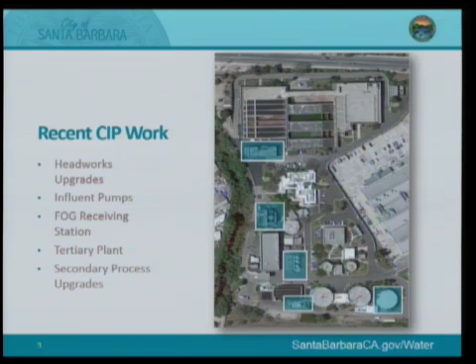And finally, in construction now, at the top, is our secondary process improvements project. That's a $32 million project where we'll be upgrading our secondary process.

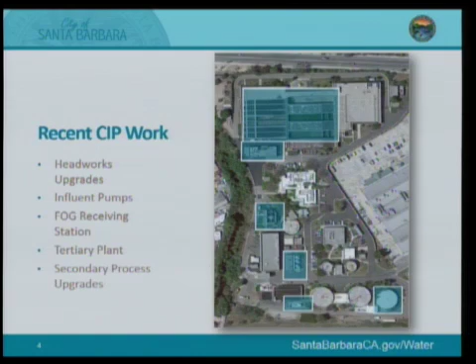So planned work on the consent item was our fiscal year 17 project. That'll be replacing some of our primary sludge pumps, looking at the line going from the sludge pumps to our gravity thickener, making sure it's in suitable condition, installing a Vactor dump station, and just some of the low-hanging fruit from our biosolids study.

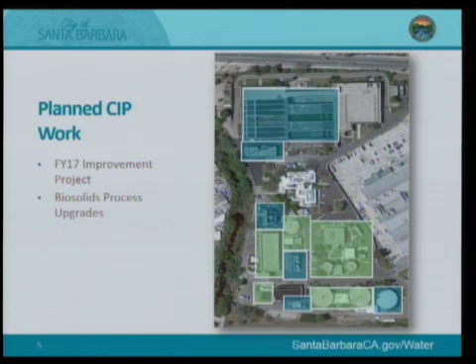We recently completed a biosolids study where we'll be doing some significant changes to the plant. Highlighted in green are all the areas we're going to be touching, and I'll just talk about it briefly so you can get an idea of the context of this project. It's going to be a $30 million process improvement project where we'll be doing some upgrades to our digesters. The big green box on the right-hand side, that's where we have our maintenance facility, our gravity thickener, and our DAFT.

Those are all used to thicken the sludge before it's pumped to the digesters. We'll be basically tearing all of that out, going to centrifuges to thicken, which is going to be a much smaller footprint, and then installing a sludge haul-out facility.

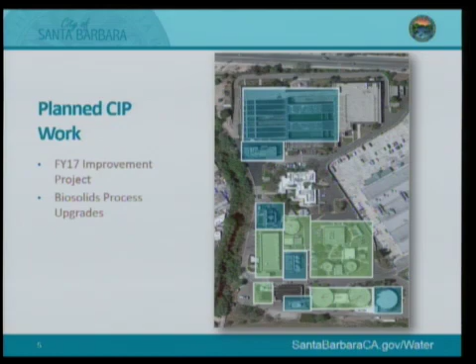Our sludge building, our solids building, is on the left side. That'll be transformed into a maintenance building. It's got some seismic issues, so we'll be making those upgrades. In addition, we'll be removing our sludge holding tank, and that area where we place all of our solids out to dry before we haul off, that whole mess, will be all cleaned up because we'll have a new state-of-the-art haul-out facility.

So what's left? There's a lot left to look at. We've taken care of all of our major process areas. Now we're going to be looking at replacing equipment.

One of the big items we'll be looking at is our electrical distribution system. 4 of the 5 electrical distribution system substations are shown on there. Those need some work. Those are very critical to keeping the plant running, and we'll be looking at that in combination with our 2 generators to make sure we rehabilitate and are well equipped for power losses. We have a 2 megawatt generator and a 900 kilowatt, but the 900 kilowatt definitely needs to be replaced.

And we need to work through a process on how to best equip us for failures, especially if the 2 megawatt were to go down. That's the one we rely on when we have a full power outage, and it runs the plant.

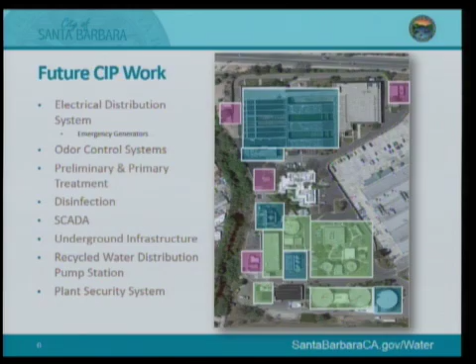We'll be looking at odor control systems. We've got some that will be taken care of with the biosolids project. We do have at least one that will need rehabilitation.

We'll be taking a look at the primary and preliminary treatment areas. Our grit chamber is a single point of failure. We can't take it out of service right now to repair or rehabilitate it. We'll be looking for solutions to do that in the future, to give us more operational flexibility.

We'll be doing some replacement of equipment at the primaries.

Disinfection, down at the bottom, we'll be looking to do some work on our chlorine contact chamber. It's in need of significant repairs. Operationally, it's very challenging for us to go in and clean it because you can't take that process out of service, and we don't really have any way of bifurcating it right now to do cleaning. It was a challenge last time we cleaned it. We need to clean it fairly soon, and we'll be looking for sensible solutions to fix that area.

We'll also be looking at our SCADA system, upgrading our SCADA master plan, coming up with a plan on how to phase out our old software equipment and bring in new.

Underground infrastructure, most of it is in pretty good shape, we think, but we want to look at when we should start replacing it. We have been doing manholes. We have more manholes to do and getting them on a cycle.

So that's some of the work we see coming on the horizon. The approach we'll be taking is developing a roadmap. This will be a more detailed 10-year plan where we'll be developing packages of projects based on criticality and funding over the next 10 years.

We'll have the schedule dialed in, we'll understand the cost estimates, but we'll also be looking at the 25-year plan. What else do we need to be thinking of between the 10 and 25-year time frame, though not quite as detailed a look. Brown & Caldwell is going to go through and take a look at all of our equipment, our maintenance records, our record drawings, and some of the studies we've done recently. We've done a concrete assessment study and an electrical study, putting that all together and ranking everything on a criticality basis.

The map or grid you see in front of us has on the vertical axis the likelihood of failure. Where do we put that based on 1 to 5, based on previous maintenance records, lifetime expectancy, and things like that. On the horizontal scale, you see the criticality of failure - how critical is that piece of equipment in our process, 1 to 5?

At the end of the day, the product of those two numbers gives us a criticality rating. Everything in the red, that stuff we're going to address first because it's the most critical - more likely to fail and it's got a higher criticality rate. The green will be pushed out probably into the 10 to 25 year time frame.

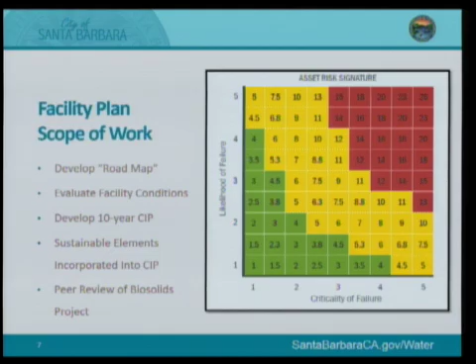While they're doing this, we're going to be looking at sustainable elements. Probably one that comes to mind is reuse. As we're going through trying to put packages of projects together, we'll take a look at where our long-term goals and plans are, and make sure we're not putting something in today that we'll be ripping out tomorrow.

And the final thing they'll be doing is a peer review of our biosolids project. As you saw from the green squares, there's a lot of moving parts in there. We'll be demolishing whole buildings, and we want a peer review before we really commit to that plan.

One thing this facility plan is intended to do is help match pay-as-you-go funding with the projects, and confirm that our 10-year financial plan is on the mark for rate increases, so we don't have any big surprises coming down the road with funding.

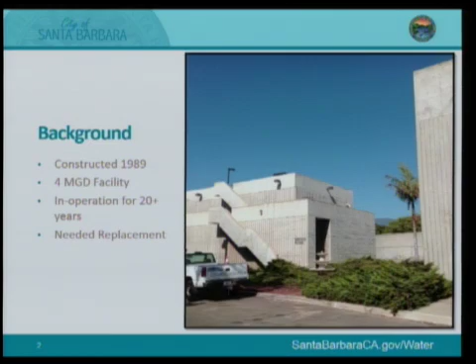Back in 2012, we made the decision to replace the facility in its entirety rather than rehabilitating it. Those are some of the pictures you see of the corrosion on the old facility. In 2012, we did an assessment and preliminary design. In 2013, we did the final design, and in 2014, we started construction.

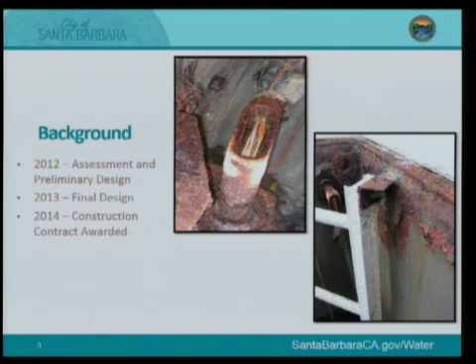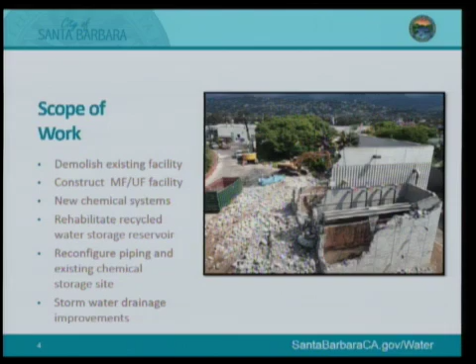Construction is now complete. The scope of work included demolishing the existing facility - there's kind of a fun picture of it partially demolished - constructing the new MFUF facility, putting in new chemical systems, rehabilitating the recycled water storage facility, reconfiguring some of the piping, and some stormwater drainage improvements. That's the bulk of the improvements.

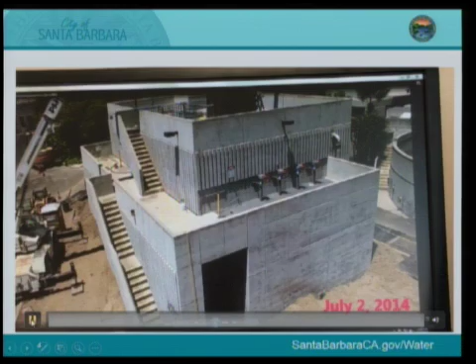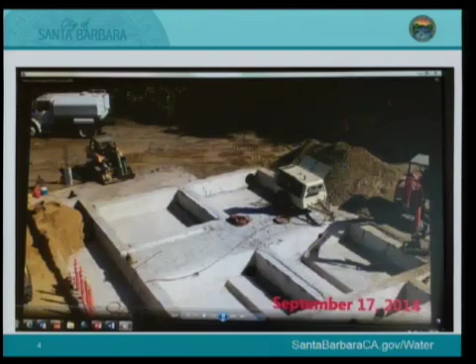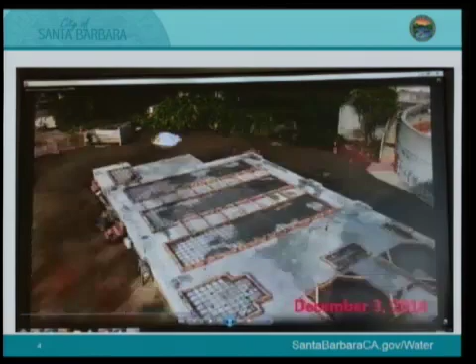Kind of a fun little slideshow here that's going to show you it get constructed. We installed a time-lapse camera, and these are just snapshots of it being demolished. Now you're going to start seeing the foundation being built - that's some of the concrete work that was done. This is the foundation; you'll start seeing the 3 pads for our 3 UF trains.

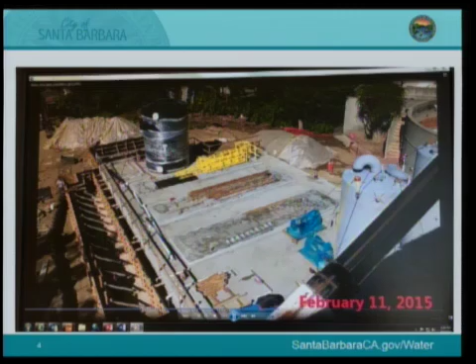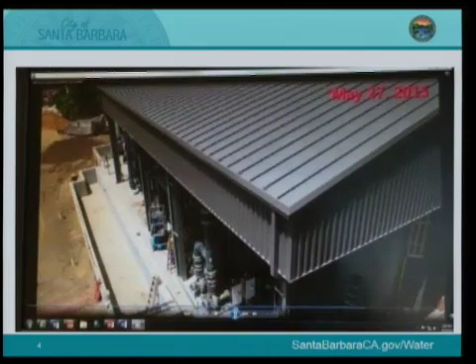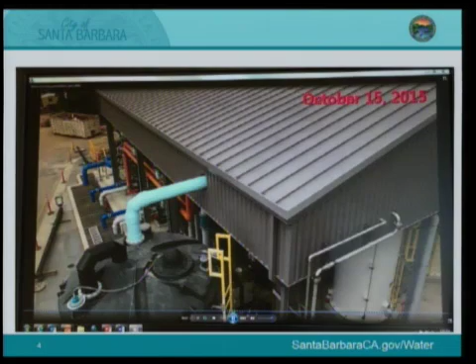On the left side, they were installing the trench for all of the utilities - those are the skids right there. Unfortunately, they put the canopy up right now, so it's harder to see, but you'll start seeing some of our tanks. We had the chemical tanks being installed, and you'll see a big black one - that's our filtrate tank. And there it is, complete.

On October 30th, the regional board gave us permission to start distributing recycled water. We did that, and at that time, we were only able to reliably produce about 0.7 million gallons of water per day.

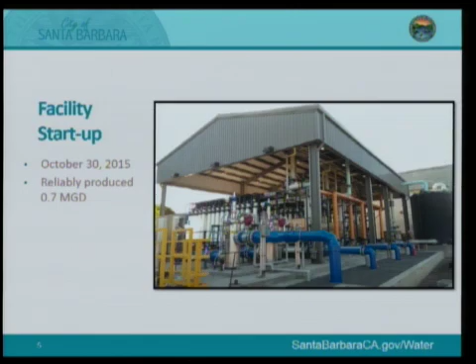Back in June of 2016, we contracted with Trussell Technologies. They were helping us optimize our recycled water production. The goal was an 8-week contract so that we could increase production and meet summer demands without having to augment with potable water. In addition, they were to evaluate the membrane system capacity.

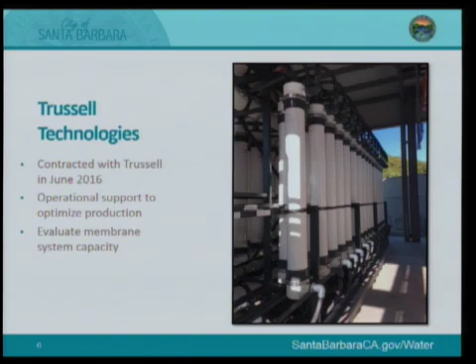Some of the things Trussell has worked with us on, that I'll go into greater detail on, include a lot of operational changes to our cleaning protocols, some programming changes, our backwashing. We installed a coagulant system, and also made some process changes at El Estero. All of this to get us up to about 1.5 million gallons per day of water to meet the summer demands.

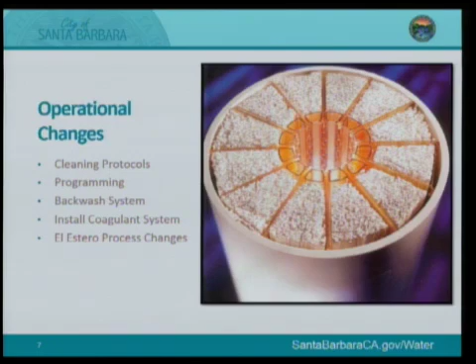So as I talk about changing our cleaning protocols, we have a couple of different chemical cleans that we perform. We perform mini cleans, using an acid and an alkaline clean. Those help us with the scaling and the metals, and also with the fouling from organics. And then we also have the full cleans. Those are not as frequent. They are more intense, to help restore the overall permeability.

When we first started with Trussell, we were doing mini cleans on a time-run basis. So every time we had 48 hours of run time on a skid, we would do an alkaline clean. The alkaline clean is for the organic fouling. And then every 96 hours of run time, we would do the acid clean for the scaling and the metals. We were seeing a lot of fouling with that cleaning regime.

In addition, with our full cleans, we were doing them on a monthly basis, and we had no real flexibility. So we came in, did a lot of programming, some trial and error, and we've gotten to the point where we are doing the mini alkaline cleans on a daily basis. Before, it could have been anywhere between 3 and 5 days, dependent on runtime. We do them now every single day.

We do them at night when we have the least amount of flow coming into the plant, so that we can get the highest amount of production during the day when we have the largest amount of feed water. We do our acid cleans every 3 nights. So all in all, we're now doing 4 cleans per night. We're cleaning all 3 of our skids for organics, and we rotate through the 3 skids for the inorganics. We also do a full clean once every 3 weeks, and we rotate through the skids.

This may be a silly question, but why can't we flip the filters over? If we're getting settling at the bottom, can't we just put the discharge on the bottom? Well, it's gravity that's settling them down, so we just changed up the regime and worked with it so that we've got a more effective use of water and air to keep it agitated, suspended, and flushing it out. It's been working really effectively to do that.

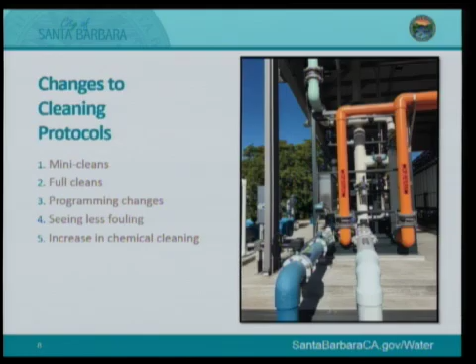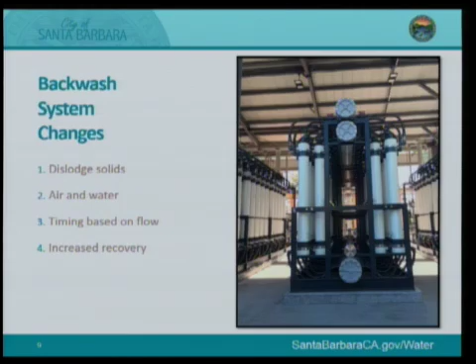I don't know that flipping it upside down would necessarily do much, because if you don't have the right combination of cleaning, you're still going to have it settling. If it's settling to the bottom, it'd be easier to flush out the filters. You also have your sewer drain line—the white pipe coming out on this side is your drain back to sewer. Your backwash water comes in on the top and drains out the bottom, but you're still getting it collecting. Your feed water comes in on the bottom.

The next thing we did is we installed a coagulant system. The coagulant system is going to help with that colloidal fouling—those really small particulate solids that get into the membranes, pass through, clog up, and cause fouling. The coagulant helps the particles cling together and become larger so they're not able to pass through the membranes to begin with.

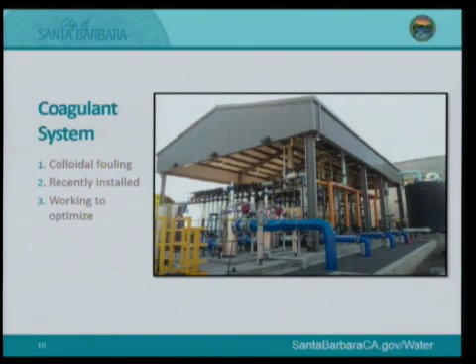It was recently installed. When we put the skids to work really hard, if we have to produce a lot during the day, we'll put the coagulant system on. We haven't seen great results yet, but we're still working to dial it in, and we'll be working closely with Trussell to diagnose whether we need to apply it further upstream in the process to give it more time for those particles to clump together. It's still a work in progress, but we feel it will be effective in helping with overall production.

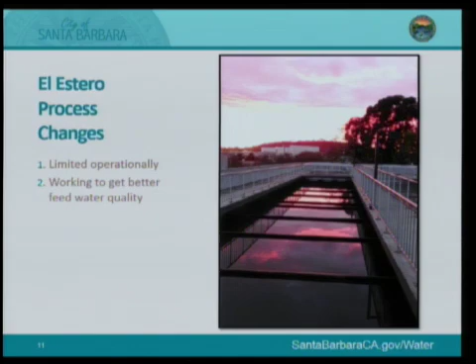We've also done some changes with our secondary process. There's not much we can do because of the state the plant is in—we're doing that $32 million project that will help us tremendously with water quality in the future. What Trussell is helping us do is operate much more aggressively than we ever have in the past. We're increasing our SRT, our solids retention time—that's how long a solid stays in the system before it's wasted on average. When you increase that SRT, you get better water quality: lower turbidity, lower total suspended solids, which is all better for filtering.

However, as you start to increase your SRT, there becomes a point where it becomes challenging to manage operationally, because you start floating in and out of nitrification, which can be problematic. We've seen this in the past where we denitrify in the secondary clarifiers—there's a picture of a secondary clarifier—and you'll end up floating sludge over the weir and violating your permit. So you have to be very, very careful. It's a very thin line between in and out of nitrification.

So we've stretched it about as far as we can. Traditionally, at this time of year, we do float in and out of nitrification. It's something that's very hard to control. We're currently doing that, and they're working with us to control it. We're challenged by our air, our blowers—we have too much from one blower, not enough from another. We just don't have that range we really need to better control it. And there's some operational practices that they're working with us on.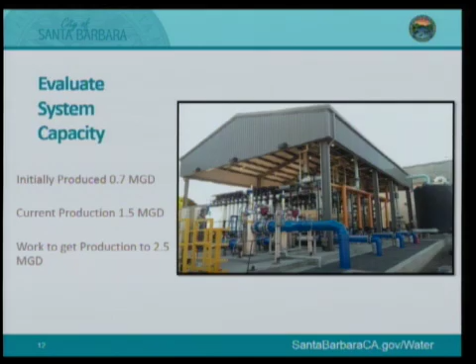We've also continued our negotiations with La Cumbre Country Club, who's very interested in connecting to our recycled water system. Unfortunately, until we can achieve that 2.5 MGD, we just can't commit to selling them any recycled water at this time. But they are extremely anxious to get connected, particularly as this drought wears on. They do see this as a viable future for them, and it's unfortunate that we haven't been able to get the facility up to that full capacity.

So with that, I'd be happy to answer any questions on the operational performance. I've got a question on the size of this facility. We started out with a 4 MGD and tore it down, and we built a 2 MGD plant. Was there a specific reason for that? What's our master plan sized recycled facility?

So we went through that during the preliminary design phase, looking at how much water we anticipate needing. We looked at the urban water plan and the city's long-term water supply plan, through about 2030, and what the needs would be. We sized it at 3 MGD. At the current state, we're looking to get 2.5 MGD out of the plant.

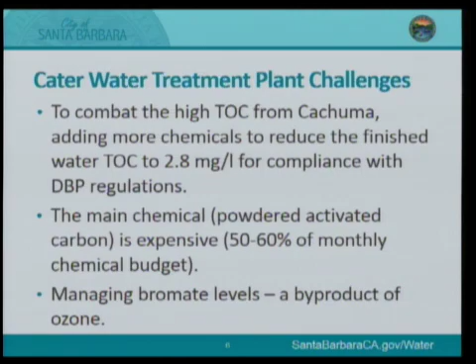Managing bromate levels is a challenge because it's a byproduct of the ozone process. The Stage 2 disinfection byproduct rule regulates these DBPs to 80 parts per billion for trihalomethanes and 60 parts per billion for haloacetic acids. These DBPs increase with warmer temperatures, since the lakes are lower, and with higher TOC levels contacting chlorine in our drinking water, and also older water. We're not seeing a lot of water turnover in our system, so the DBPs increase with that.

We have an ozone plant at the Cater Water Treatment Plant. This was a major capital project a few years ago to assist with the Stage 2 disinfection byproduct rule. We use ozone as a pre-treatment; it's a superoxidant that reduces the DBP precursors in the water. By reducing the precursors before the treatment plant, the idea is fewer TOCs going out through the finished water.

However, as I said, bromate is a byproduct of ozone, and we're regulated for bromate levels with a maximum contaminant level of 10 parts per billion, and we're currently at 6. We have 8 disinfection byproduct sample stations throughout the distribution system that are sampled quarterly.

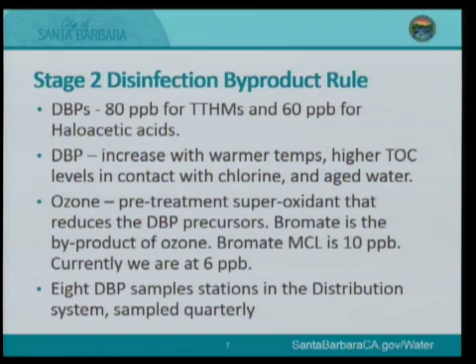So we have basically a perfect storm brewing here, in the sense that with the reservoirs being so low, we have a more concentrated total carbon load in the reservoirs. The reservoirs are warmer than normal, which is challenging, and then we have very low demand in the system.

It's very typical for us in the winter to take reservoirs offline to increase turnover of water, basically the age of the treated water in the system. But in August, of all things, we took one of our key reservoirs offline, which we only normally do in the winter, to help boost demand in the system and keep the water turning over. Because the longer this water with organics is out there interacting with chlorine, the more this reaction occurs. So it's a delicate balance that Kathy and her staff are working with.

Recently, this last third quarter, we had an operational evaluation level, or OEL, exceedance. This is the first time we've ever had this. The OEL is kind of like a canary in the coal mine for our distribution system—it's saying you're having a problem with your TTHMs, what are you going to do about it? This OEL exceedance must be reported in our annual consumer confidence report that we send out to our customers.

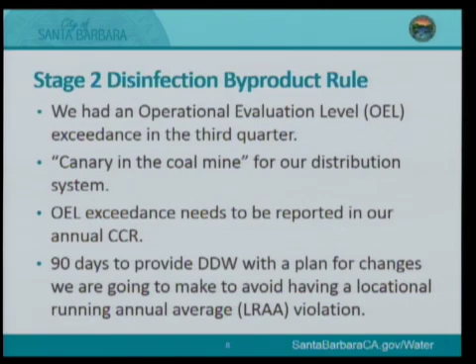If we violate on the LRAA, which our next testing will be on November 7th, 2016, that will require us to notify the customers represented by that specific sampling station. So our plan for reducing the TTHMs, or trihalomethanes, by this fourth quarter sampling date is planning on installing a mechanical mixing aeration system at McLaughlin Reservoir.

Aeration in reservoirs has proven to be a very successful method for reducing trihalomethanes in the water. We also plan to modify the operation of the distribution system to minimize water age. As Mr. Hagmark mentioned, we have one of our reservoirs offline currently, so that's less storage in the system, and the water is turned over more frequently.

We're lowering the levels in some of our other reservoirs, but it's a very tough balance because we think of our reservoirs as storage for fire protection, so we're very mindful of that. Again, it's a very delicate balance. We are also trying to lower our TOCs, the levels leaving Cater, to below 2.8 milligrams per liter. This should help in the system as well.

As for our groundwater wells, I thought this was an interesting statistic. Overall, our average water demand throughout the system is just under 10 million gallons per day, and we're in September, so I don't think we've ever been this low. Our well production throughout the city is about 2.7 million gallons per day. As for water quality, the wells have iron and manganese, which cause color and taste issues, which we treat with chlorine and filtering.

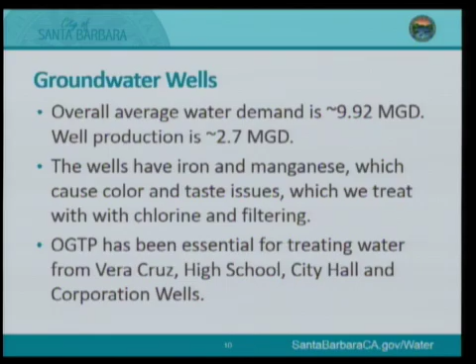At this point, our Ortega groundwater treatment plant is essential for treating water from Vera Cruz, High School, City Hall, and our corporation yard wells. What's interesting, and something we've been struggling with internally, is that Cater was designed to treat a lot of water, and its low threshold for continuous operation is about 6 MGD, which we are quickly approaching. We do treat water from Montecito and Carpinteria, but with desal coming online this winter, there could be times we need to shut down Cater for periods because we can't treat at a lower volume. We're working internally on other options and communicating with the Department of Drinking Water to see how that operation will work.

As for distribution system projects, we currently have Valve-tek. This company has a truck-mounted filter that enables us to have a zero discharge flushing operation. Flushing the distribution system is something we did annually prior to the drought for the health of the system, but we stopped because it takes a lot of water and it's also a perception problem to be flushing water down the gutters when customers are making such great efforts to conserve.

With the Valve-tek project, they connect fire hydrant to fire hydrant and flush the system at a scouring velocity to remove naturally occurring sediments that lay on the pipes. Currently they're working in the downtown area, the low zone, focusing there in anticipation of the desal plant startup, because with desal we'll be sending water in the opposite direction through the pipes. Last time the desal plant started up, there was a lot of kick-up of scaling and particulates in the water. We're hoping to get ahead of this with the Valve-tek flushing project.

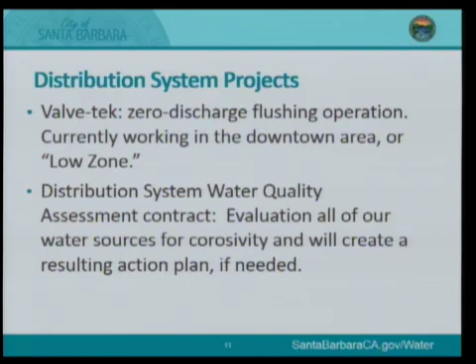We are also planning to go to council, probably before the next Water Commission meeting, with a distribution system water quality assessment contract. This evaluates all our different water sources for corrosivity and will create an action plan if needed. We'll look at our groundwater wells and surface water wells, and once desal comes back online, we'll look at desal water and how they all interact, checking for any concerns about corrosivity within the system.

I'm struck with how everything you try to do good also has a bad consequence. As long as things stay the same and Cachuma just becomes a conduit for water rather than a storage facility, do the problems you just went through with treating continue? Is that just inherent with the way it will be? Yes, these problems will continue to plague us with low demands and low reservoir levels. We're going to continue to be kind of like a good advertisement for desal, right? Yes, which hasn't been used up until this point.

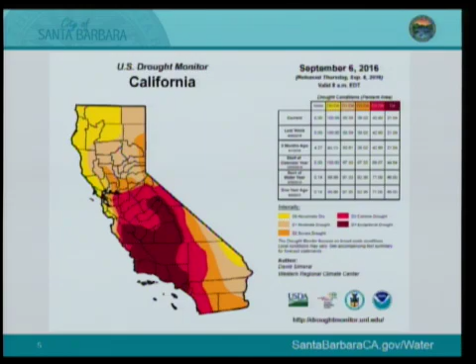It basically radiates out from Santa Barbara County. I went ahead and looked at NOAA's current predictions for January through March, our normally wettest time, and they are calling for below average rainfall. Again, we take this with a grain of salt. Last year they were saying we were going to get above average rainfall, but certainly this is not an optimistic outlook given our current water supply situation.

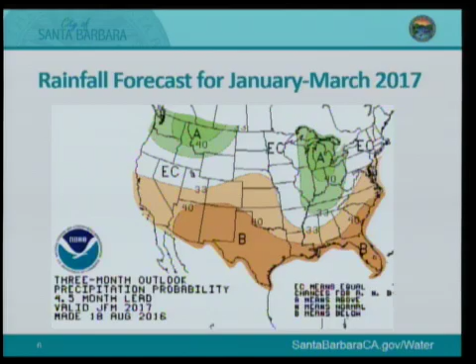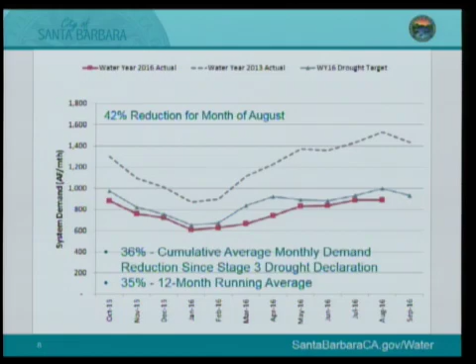On the brighter side, we saw 42% conservation from our community in August, which is outstanding, particularly what we're going to be talking about today. And that brings our cumulative average to 36%. What I hope to be talking about in the future is a 12-month running average. I think we're to the point now we need to be talking about our 12-month running average. We're going to be looking to move our 12-month running average from 35% to 40%. We believe that's going to be the target we need to achieve to ensure that we have adequate supplies going forward under the current water supply conditions.

So we have added to our graphic here. We are, as of October 1st, entering year 6 of this drought. And in good practice, we've added year 8 to the list, so we're looking 2 years out.

We've actually done very good with our water supply planning in the sense of water purchases. We do recognize a shortage out there 2 years out, but at this time, we have adequate supplies to meet demands overall. But what I'm going to get to is that we do have some conveyance constraints, and that's what I've highlighted in this graphic here, which shows our monthly usage, with a lot of information showing the various supplies in every month.

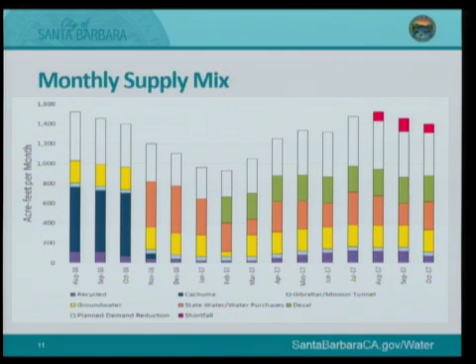What we're focused on right now is August, September, and October of 2017, this coming water year. We are recognizing what amounts to about a 300 acre-foot shortage, basically where we have adequate supplies, but we cannot get them all here. We cannot pull it out of the ground, and we can't convey it from other sources outside of the area to meet all of our peak demands. We are focused on trying to address that, and we believe we need to move forward. We can't just wait until next spring to do that. We need to start moving forward on this now.

Here's kind of the driver behind that. This blue line represents the volume of water the city itself has in storage in Cachuma. You will notice it's basically been on a decline, but it is plummeting. We basically, come January, anticipate having no water in storage, which is another first.

The challenge with that is currently the state water system is planned to go offline for about 2 to 3 weeks for maintenance in January. Ray Stokes, the general manager or director for CCWA, is pushing hard to get that suspended. They are going to try in November and do some of this work with the facilities in operation. If they can get it done, then they can cancel that January shutdown. We're hopeful that they can do that, because if they can, then that will mean we can be able to pump water into the lake in January and keep some level of storage in Cachuma.

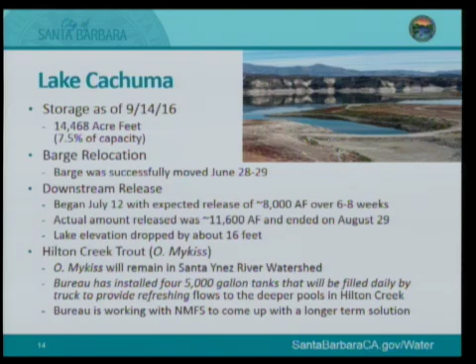So this is how the county and Bureau have decided to portray what remains in the lake. There is carryover water, which the city owns a significant share of - I think we're somewhere around 2,000 acre-feet of that amount. Then there is imported water - we are currently carrying about 600 acre-feet that the city has imported and not used yet.

Then there's this BNA account - below Narrows and above Narrows. I don't want to get too lost in the definitions, but basically it's two accounts that the downstream users hold water in. Because they released water and it didn't make it to the below Narrows account, this 1973 state order gave them the ability to release 2,000 acre-feet in addition to that water, and that's how they ended up with this larger release. They show the lake here at zero, and then there's this negative part - well, that negative part really came out of the minimum pool.

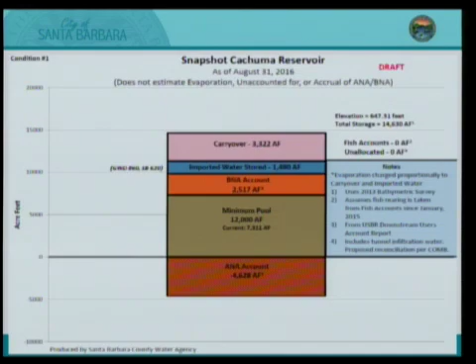The minimum pool that was sacred to the Bureau at keeping it at 12,000 acre feet is really now somewhere in the 7,000 acre foot range. That's unfortunate for this whole discussion. Is there a chance that when we get to that 12,000 threshold they don't allow us to take any more water? Or do they understand there's that gap between 12,000 and 7,000?

That's the challenge. We have our accounts that we're planning on using, and that's what's difficult about this. On a monthly basis from here on out, there will be about 200 to 300 acre feet of inflow into the reservoir that will start filling this negative, which likely, if all things work out by next spring, hopefully the negative is gone. That's the best case scenario.

But here's a comparison. This is what we knew in June, I believe June 30th. We had carryover water at just under 6,000. We had a little bit of imported water stored in the lake. The downstream users had a total in storage of 7,800 acre feet, and we were anticipating a release of somewhere around 8,000 because this account continues to grow every month. Then we had the minimum pool. We ended up with this, a minimum pool now with 7,300 in it, this negative that they're carrying on the books.

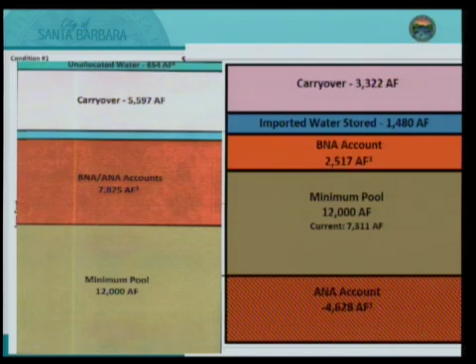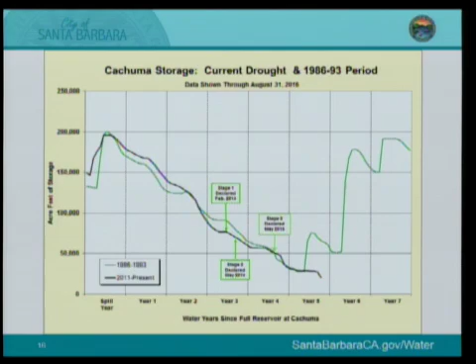And then, of course, the imported and carryover water. Where does that put the lake? As you recall, this spring we entered uncharted territory. The last significant drought of record in the 90s, we had the miracle month of March, where we received 23 inches of rain and got a bump of about 47,000 acre feet of runoff into the reservoir. We missed that, it didn't happen, so we are now in very much uncharted territory. It's interesting that 23-inch rain event, occurring basically in one month, only put 47,000 acre feet of water into the reservoir. That was pretty significant and startling. We don't anticipate a rainfall event this winter that will fill the lake. We are hoping for just something to at least improve the situation.

We did meet yesterday with COMB and their consultant, and it looks like if we don't get adequate inflow, a pipeline extension from the dam to the barge would not be necessary until spring of 2018. That was very helpful information to know. It was updated with all the latest information we have, assuming no more surprises, which means we do still have some time to hold off on design and planning for this pipeline extension. We believe we have until at least next spring to kick that discussion around. But as was brought up by Commissioner Jordan, the ability to store water in this lake to meet those peak demands is really important, so how to preserve that when we do start to get down to that level is important.

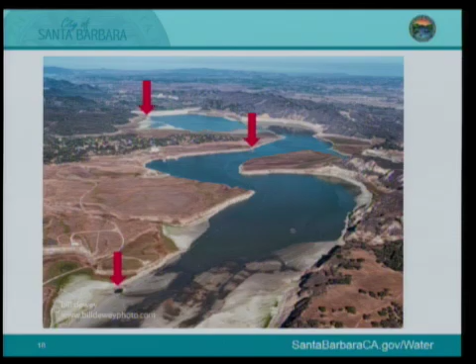I apologize for the small font, but I wanted to cover this quickly. The State Water Rights Order, something we've been waiting for, pushing 15 years I think, was finally issued. A draft was finally issued on September 9th, and we are working with CCRB and its member agencies of Montecito and Goleta and the CCRB team of biologists and hydrologists to provide comments by the October 25th due date. This is going to be a push for us.

Our main focus is to review the effects of the invasive species. That's ultimately the whole intent here, to restore steelhead habitat. We continue to be plagued by bass who thrive in warm water and are a natural predator of steelhead, and there are many other predators along the river that have made recovery of the steelhead difficult. But we will be commenting on that, and we are evaluating what the impacts are of the State Water Rights Order. It isn't what we had hoped for, but it also isn't exactly what other agencies were hoping for either. We call it a hybrid, and we do need to do some modeling to understand what the water supply impacts are from that.

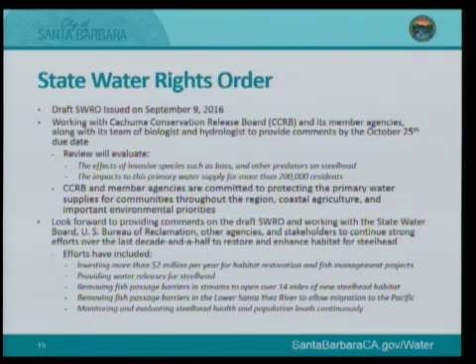To remind everyone, our efforts to date - we've been investing more than $2 million a year trying to restore steelhead habitat along the Santa Ynez River. It's a significant investment. We have removed barriers along 14 miles of creeks and tributaries feeding the river, and we continue to try to remove barriers and increase passage. But it's definitely challenging, particularly in these dry climates. I'm guessing 100 years ago the steelhead would just hang out in the ocean and wait for the water to actually come back, but we have some fish hanging on that we're trying to maintain, the few that are here. Monitoring and evaluating steelhead health is a key component.

Is there any questions about the State Water Rights Order?

Gibraltar - what's your process for the comments? Putting our comments together is going to move fairly quickly. There's a potential that an extension could be granted, but we aren't guaranteed. So we're really focused on the 25th, and our comments will be coming from CCRB, shared with council and commission.

So Gibraltar - I just want to make sure the Water Commission knows about this, because it will probably get out into the public as well. We will be doing a release. It's part of a release we have to do as part of a Gin Chow settlement, but we're also just going to go ahead and let the remaining water in the lake go, in the hopes...

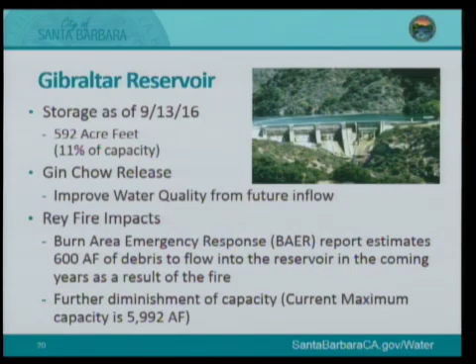On Drought Response, I'm going to report that all 8 of our wells are up and running. We continue to monitor for seawater intrusion, and we're going to be increasing the frequency of that monitoring. We've been working with USGS to get that going, and so far we've been fortunate, but I don't expect that luck to last long, and our supply planning takes that into consideration.

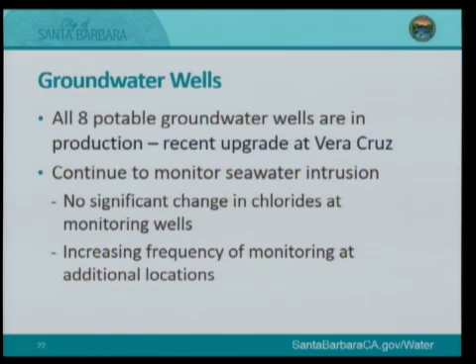In cooperation with Council Member White, we reviewed the hydrogeology of the Foothill Basin, and it appears there's something like 100 or 150 feet of aquifer thickness below the deepest wells out there. The hydrogeologist Robert Marks felt it would not be efficient to try to drill deeper there, but if things continue to get worse, it might be something we'd want to revisit. That aquifer or basin has the advantage that it's not connected to the ocean, so we don't have seawater intrusion - though that may come back to haunt us.

Well, we've made some assumptions about what we'll be seeing. We consider this year peak water - we considered 2016 to be the peak water year for our groundwater, and we do our planning for diminished capacity going forward.

Just really quick, running through: the structural foundations are complete, major underground work is complete, the treatment trains have been placed in, and we've just recently gotten power. They are testing the equipment now.

The biggest threat right now remains the intake pipe. There are critical components we shared in a presentation with council - critical transition pieces where the power and communication lines that go out to the pumps in the ocean have the potential to delay this project.

They're very custom pieces, and unfortunately our predecessors, when they did this project, went as far as duct tape and baling wire - they were throwing it together quickly. There was an emergency then, and they cut some corners that are now kind of biting us. So we're trying to make it right and fix it, but it is throwing up one of the most significant challenges, and this is something our construction manager is watching closely.

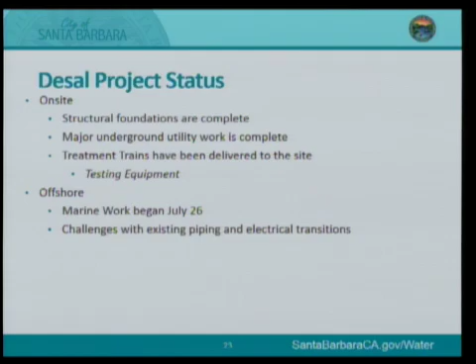We do have approval to work in the ocean though, and we have divers out there on a regular basis now installing equipment. We will keep the Water Commission up to date on changes to the schedule, but right now the operational plan is January 25th of 2017 is when we plan to be in production.

One of the biggest challenges is there's about 42 days it takes to ripen these filters - growing bacteria on the filters so that you get adequate treatment. It's kind of an interesting process. So basically 42 days before January 25th is when we hope to be bringing seawater on shore and running it through the filters. We are working to see if there's anything we can do to expedite and shorten that period, and that's what we're focused on as well.

When we met in July, the potential start date or the expected start date was October or November. Now we're at January - what happened?

Commissioner Burney, the big trip was these transition pieces. We initially pressure tested them, and far below their design pressure they started to leak. Rather than go ahead and hope that they would hold, we moved forward with replacing them. It was also challenging because these communication and power lines actually run through the feed line - they transition in and out. They just poured them in concrete as they go in and out, so it didn't allow us to pull them out, which was the plan - to pull out the old wires and put in new ones. That was the other part that fed into this, why we need to do these transition pieces.

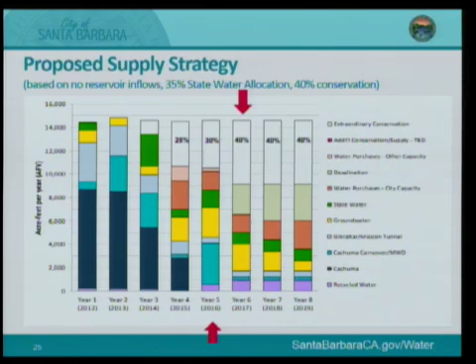This takes us to our discussion today, and in particular, how do we get the community now to achieve a constant 40% conservation. What we have before you is what we are proposing, moving to this 40% conservation. We are currently in year 5, and we'll wrap that up shortly and be into year 6. With 40% conservation, you'll notice the additional need for new supplies kind of goes away in year 8. It also addresses that peaking issue I mentioned earlier, because we're allowed to build up additional supplies in Cachuma to help us meet those peak needs.

We've been very successful this last year in acquiring imported water. In fact, we got our Dudley Ridge bank water back. We purchased 4,000 acre-feet, and our state water allocation this year was almost 2,000, giving us a total of 7,265 acre-feet of water. As you may recall, we have the capacity to deliver 3,300 acre-feet a year.

This year will be more than that because we were able to take advantage of excess capacity. I don't have that number today, but it'll probably be in the 4,000 acre-foot range. We don't anticipate that going forward, so we are planning around a 3,300 acre-foot number. Certainly we will take advantage of excess capacity if we get it.

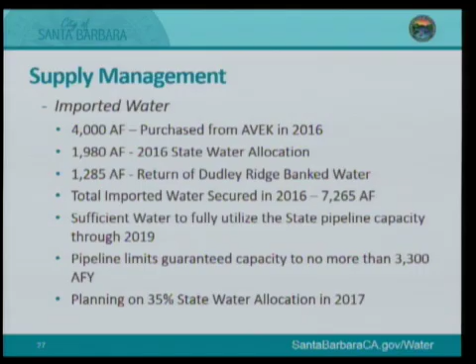As I mentioned earlier, Cachuma carryover water in storage is anticipated to be exhausted by December of this year. Cachuma will play a key role in the storage and conveyance of our imported water, and conveyance through Cachuma is expected to require a bypass pipeline by the spring of 2018.

Groundwater peak production was in 2016, and we are planning for a decline in production. We continue to watch seawater intrusion, and we have worked up a plan for what wells we will idle when we start to see those elevated numbers go up.

Desal current production is anticipated in late January, but as I mentioned, there are vulnerabilities to that construction that has us very concerned. That's one reason why we believe we need to be planning for a contingency, given our imported water delivery constraints and the anticipated supply shortfall if we continue with our 35% conservation.

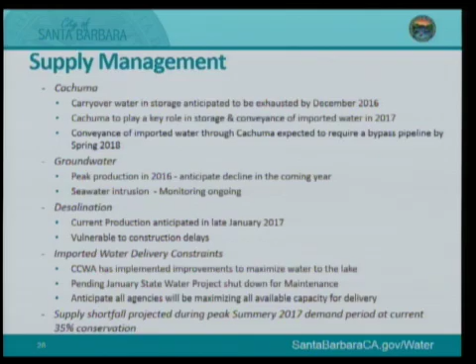So this takes us to the demand management side of this, in particular the regulations that the city can implement to try and achieve additional conservation. As I mentioned, our cumulative average is currently at 36%.

The state has kind of backed off because a good portion of the state is not experiencing drought conditions, so they're not requesting any additional regulations. But we are facing a worsening water supply situation. Things have not improved, and based on NOAA's forecasts, we don't see things improving, so we believe we need to continue planning for the worst.

With city regulations, we are projected to have a 300 acre-foot shortfall in the summer of 2017. We also believe strongly that we need to reestablish a contingency supply, and we believe it needs to be a minimum of 500 acre-feet.

In our supply planning we've always had some contingency planning. I'll just be honest with you, that contingency planning is gone. We just do not have it anymore. And we believe we need to rebuild it, and the way to rebuild it is through additional conservation.

Our goal is to protect the community's investment in trees and shrubs, minimize impacts to the economic activity in the community, and generate 800 acre-feet of new savings.

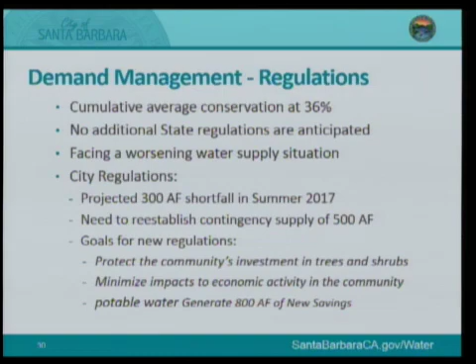A general ban on irrigation of turf grass has been estimated to save between 500 and 1,200 acre-feet a year. It's very difficult to guess at this point because a lot of people have already let their lawns go, and it's difficult to know how many people will comply with this. It's not going to be something we can go into people's backyards and check, and that's why you see the range.

My gut tells me, based on what we've seen from this community, it will probably be closer to 1,000, just based on the support from this community, the engagement, and the understanding of the concerns we're facing. So I do believe the 500 is on the low end, but we wanted to give a range because there is some uncertainty to that.

Now, elements of a proposed ban on irrigation of turf would include residential exemptions when incidental to irrigation of the drip line of trees and shrubs. We're working through these issues now.

This is the kind of stuff we're going to look for feedback from the Water Commission at the end. We're working with parks right now on trying to come up with information that we can give out to the public. Our preference would be for people to use soaker hoses to water their trees, not sprinklers.

We're really trying to get away from sprinklers. It's just a really inefficient way to apply water, in particular at this time.

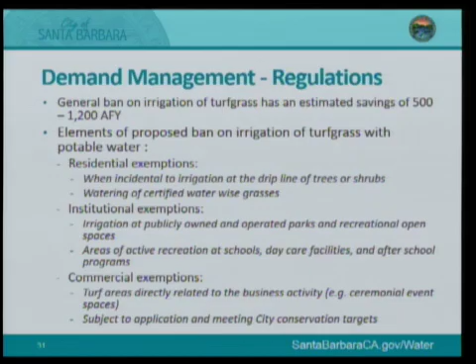Are there any golf courses being watered with potable water right now? Not within the city. All city golf courses are supplied with recycled water. Like we had talked about earlier, La Cumbre Country Club is currently still watered with potable water. They're very interested in getting access to our recycled water, and when it's available, we would love to make that available to them. Are they getting potable water from La Cumbre Mutual? Yes.

And then areas like active recreation at schools, daycare facilities, and after-school programs - these kinds of facilities really, in the big picture, are not big water users. I think there's a greater public good to allowing some of this to move forward, but again, we're looking for comments and feedback.

Commercial exemptions: turf areas directly related to business activities, ceremonial event spaces. We are contemplating exempting those, focused really on just grass that no one uses, no one recreates on - that's the stuff we really want to go after. If it does have significant value, we'll have a process where they explain what they're doing, and we'll be looking at how they're trying to meet the 40% conservation as a whole, even if they need to water that turf.

So this is kind of what we're laying out for turf grass. I want to keep going, and then we can talk about all of this at the end. At this point, I'm going to turn it over to Ms. Brooke to walk you through what new development means to the community.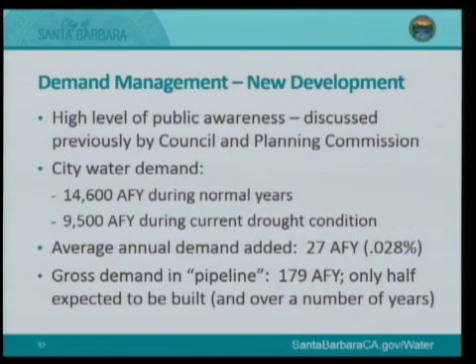And this just shows in a chart the 179 acre-feet per year that I mentioned, accounting for all pending and approved projects.

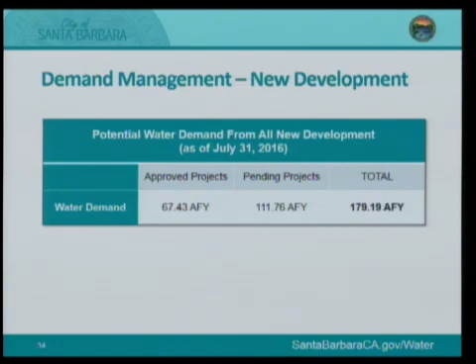When we've had these past discussions with City Council and the Planning Commission, they have on every occasion determined that the quantity of savings that could be found by restricting new development, restricting issuance of building permits, or placing some kind of moratorium on development - they found that savings is well short of our projected supply shortfall. Again, that's on average about 27 acre-feet per year, with the worst case scenario of what we're seeing in the pipeline right now of 179. Also, as Joshua mentioned, our shortfall in 2017 - if we restricted development at this point, we wouldn't necessarily see that savings in time for next summer, because it does take time to go through the building permit phase and construction and actually begin to demand that water.

It would likely have significant economic impacts on our construction industry and others who may be living in these new projects. It's important to note that any new construction would be subject to the same water use regulations as existing customers. So for turf or landscaping installation, all new projects need to comply not only with our adopted standards for low water use landscape plans, but whatever water use restrictions are in place.

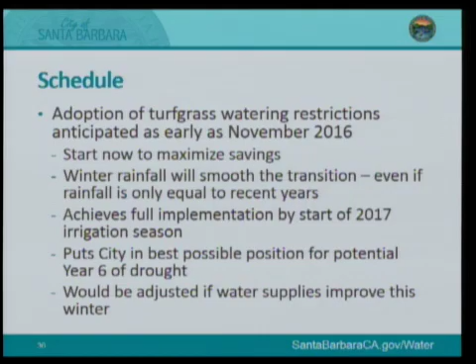We just can't afford to trip and stumble, so having the community ready, having our enforcement ready, and the ability as soon as the 2017 irrigation season starts to start recognizing significant savings is an important part of that. It puts the city in the best possible position for potential year 6 of the drought. And if we do get considerable rainfall, easily any restriction could be adjusted and restored fairly easily. We could put that back or remove that restriction. That's primarily why we feel like we need to move forward on this quickly.

On budget, we expect added revenue losses with the new regulations. Our very preliminary numbers suggest moving from 35 to 40% conservation will be about a $3.2 million loss for a full fiscal year. Since this is halfway through, it'd be about a $1.6 million loss.

So our options are additional use of reserves. As you know, we're planning to use about $7 million from reserves this year already, so that's one aspect to consider. But do we just go ahead and absorb those costs this year, or do we consider a drought impact fee? This fee is to basically offset the revenue loss we just talked about. It'd be a fixed amount over all units of water sold, similar to what surrounding agencies have implemented. We'll be exploring this, and we'd welcome any feedback.

Enforcement - I want to make sure everyone's aware of this, and for those like Commissioner Keller who were around last time, enforcement is a touchy subject, but we believe we need to have enforcement for us to be successful at meeting our goals. This would include staff patrolling during key outdoor watering times. The violations process has already been defined in our municipal code. There are basically 4 offenses, starting with a warning, and these are already in play right now for offenses of water wasting.

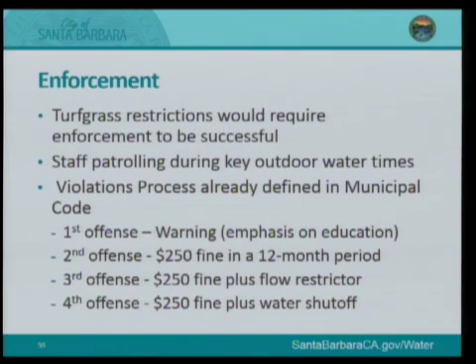Other water-saving measures that are out there include rationing - basically putting every customer on a budget. This is what the city of Santa Cruz implemented. It does take a significant amount of staff resources. We'd probably be bringing in consultants to support us to develop individual customer budgets, and then of course the time to manage that. There's typically a school you can go through to get your first offense waived, but anticipate that establishing a rationing program will take us about 12 months to develop.

We are open and listening to the Water Commission and the public - what other water use restrictions do they believe we have not mentioned or should be considering? We also wanted to note that we want to continue with rebates for turf grass removal. Some of this may be counterintuitive, but we believe it's part of the long-term plan. When people tear out water wasting landscaping and put in drought-tolerant plants, it does take water to get established.

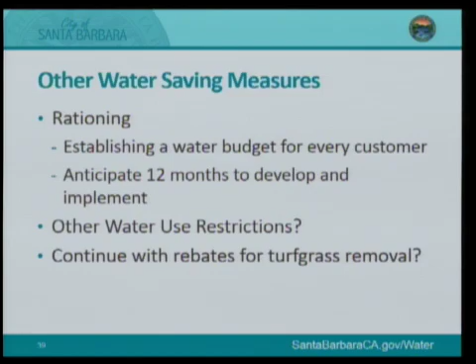However, we believe it would get this community on the right path if people have an opportunity and a rebate to remove their grass, which they currently do have now, but wanting to continue to move forward with that, where they can take out their grass and put in native landscaping. It will probably continue to demand some water, but when this drought is over, as a community, we will be in a better position.

And so we feel strongly about continuing to support the rebates for that as well. So that leads us to our Water Commission discussion and input, and I did get confirmation that we have the room until 10:30, so we can take some more time to continue to discuss this.

But we are looking for input on turf grass watering restrictions, potential exemptions and enforcement concerns, development restrictions, drought impact fee, other water saving measures, rationing, water use restrictions, and rebates. I'd like to open it up to the Commission. Who wants to start?

Mr. Jordan? Thank you, Mr. Chair. So I know we're short on time, so generally everything that you've portrayed up there I'm generally in agreement with. A couple things I find, and then what I find missing there from my perspective...

One is, again, back to a plan as part of this to recapture the maximum amount feasible of discharge water. So, that's still we're discharging water and still having to go out and buy replacement water for that water we're discharging. And so I know that's another conversation, but I still think that needs to be a big tool in the toolbox.